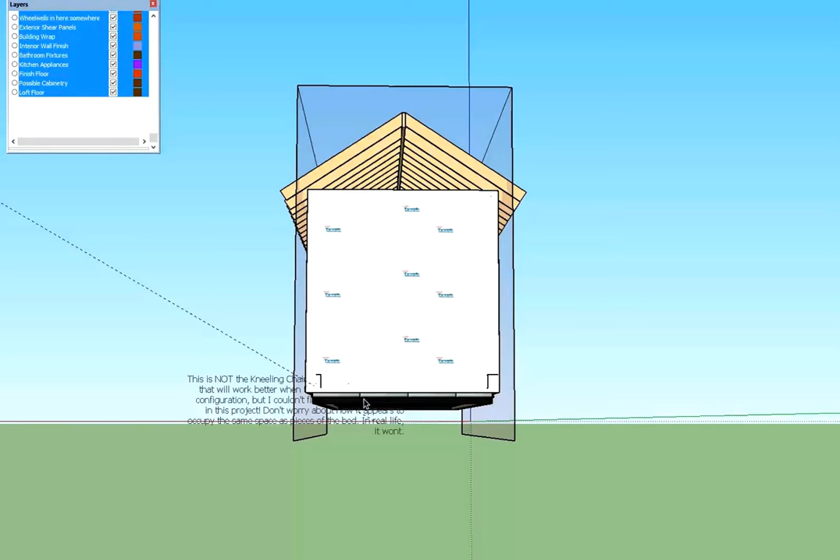Frame at a height of 24 inches above ground. You'll notice it doesn't show any wheels because that's later, and it doesn't show the tongue because I just didn't feel like drawing that in.

It didn't affect the footprint of the house. The wheels will go somewhere along in here, and that's where I started. That's also why you don't see the wheels, since the only thing they interact with is the frame.

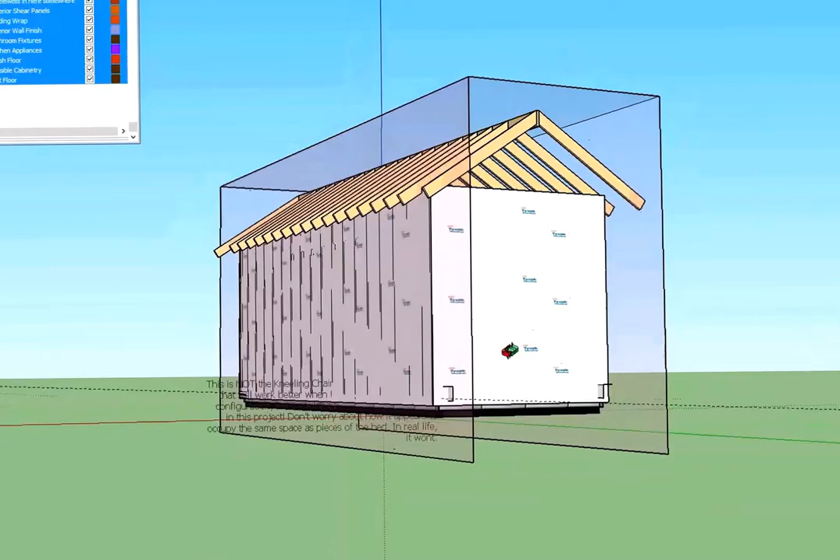It isn't a worry for me right now that I don't actually have the wheels on the trailer. However,

This kind of shaded area on three sides that extends beyond the house, you'll notice that is the bounding box for what is legal to come down the road in California, Oregon, and a few other states. The distance, most people hear 8.5 feet this way by 13.5 feet this way. That's kind of the bounding box, 8.5 here, 13.5 here.

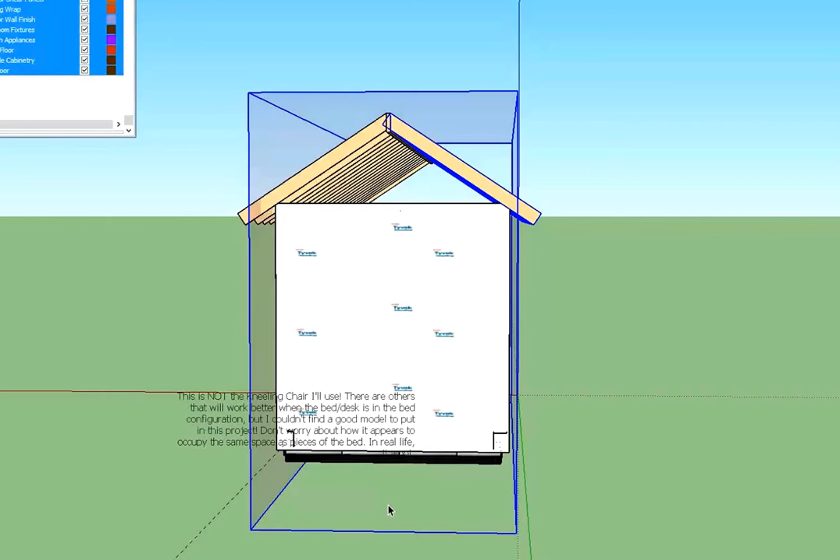Well, it turns out in California, those dimensions, 8.5 by 13.5, are kind of the lowest common denominator for all the states that drive. So it doesn't include Hawaii, but since we drive between Alaska and the lower 48... however, California and Oregon are the states where this will be, I'd guess, 99% of the time, where it will be built, etc.

And so forth. Their height limit is 14 feet, so I'm going, oh cool, I just need an extra half foot of space inside the house, so that's the bounding box.

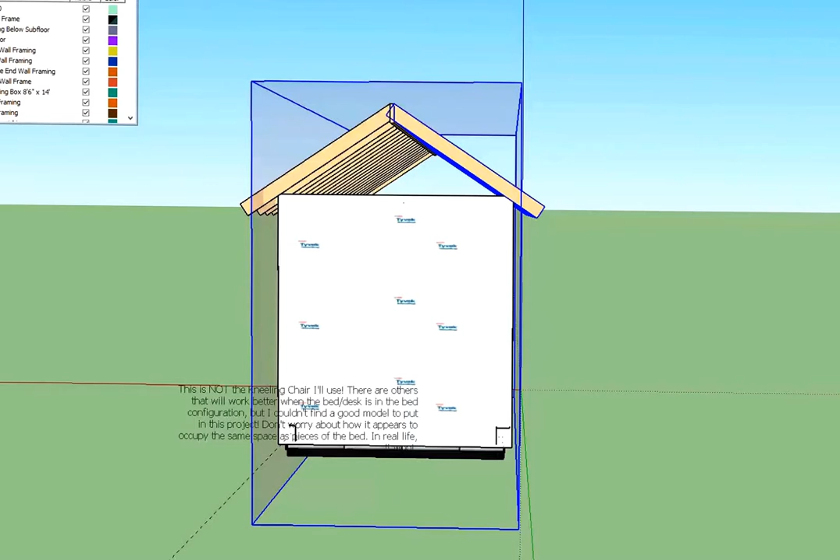Anyway, I'm going to get rid of that now. I'm just going to slowly peel these layers back until I can get some more details on the trim. So I'm going to take away that bounding box.

Now you'll see the other ends kind of sticking out. It's another kind of L-beam shape that doesn't have any volume. Those are...

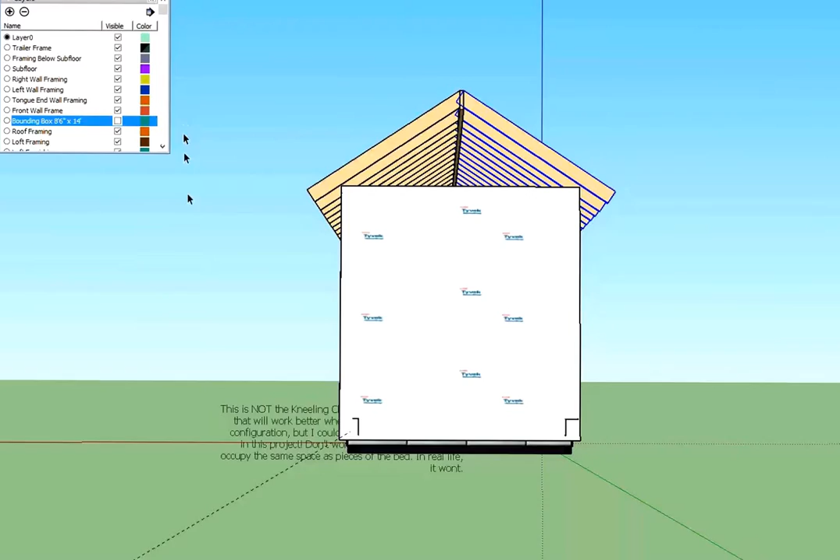If you imagine—hold on, let me just take a couple of others out. Well, let me come back to that. As you can see, I even created a texture for my Tyvek. I haven't built outward from that.

Oh, I ought to go back to the bounding box a bit and talk about the roof frame. You'll notice that right now the roof rafters are extended outside of the bounding box, and there's a simple reason for that.

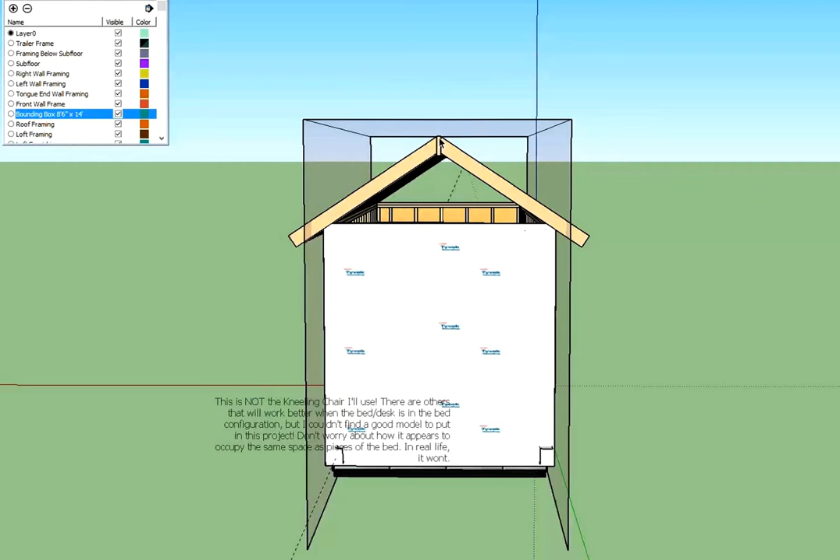I've made a few changes in the roof pitch, and it's a real pain here in SketchUp to do that. As a result, the last time I did it, essentially what you do on the roof pitch is you start out with a horizontal rafter, attach it to your ridge board, then bend it down at the proper pitch, and then start taking away from it, because when you do that, geometry starts intersecting, and that's another royal pain.

Anyway, last time I changed the pitch, it was to accommodate a roof window that is egress rated. Yes, I want to be able to get out from the loft in a fire situation if my normal route out is blocked by the fire.

It turns out that the minimum size window that would be officially rated as egress was too big for a lower pitch. I started out at 3 in 12, then I found out the roofing products I was looking at weren't okay to use on a 3 in 12, so I went to a 4 in 12 and tootled along there for a while.

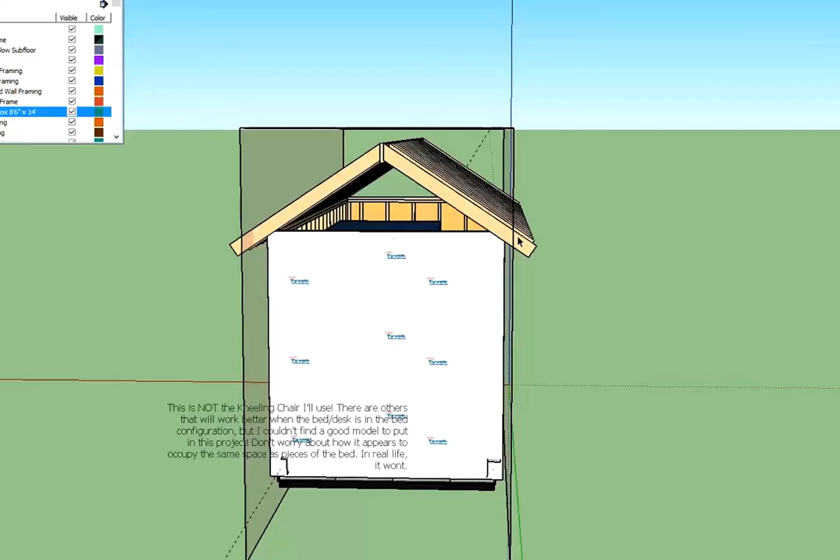Then all of a sudden I started looking into the details of the roof windows and went, oops, at a 4 in 12, the distance available for the window—which was basically draw a line, extend that line out there, parallel to this, meeting that point, parallel to this line, meeting that point, and then measuring down—

The roof window would have ended up intersecting the wall. There was no egress window I could have gone to that wouldn't have done that, and I wanted it solely contained in the ceiling. So I had to go to a 6 in 12, and I did most of the work on the 6 in 12. I just haven't trimmed out the ends of the rafters yet and done the details at the roof edge. That can be done later.

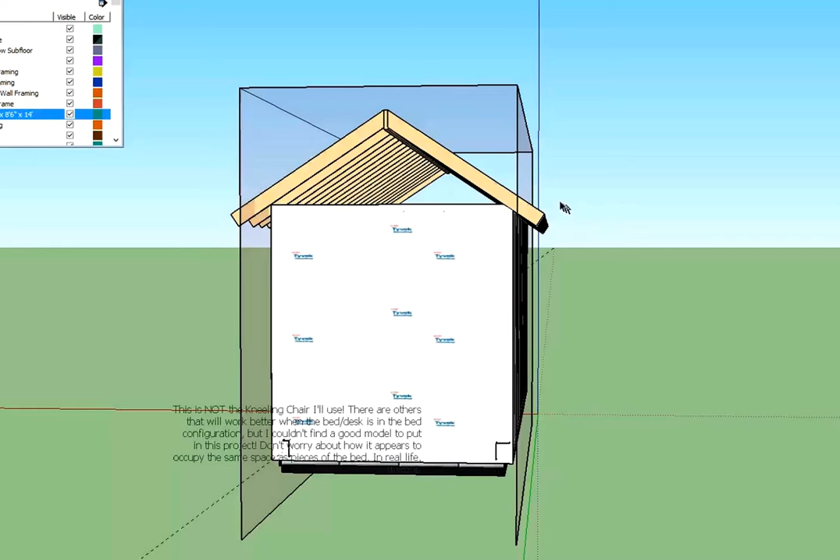Anyway, that I think is all I need to show with the bounding box. So I've got the building paper, which is here in this list to take it off.

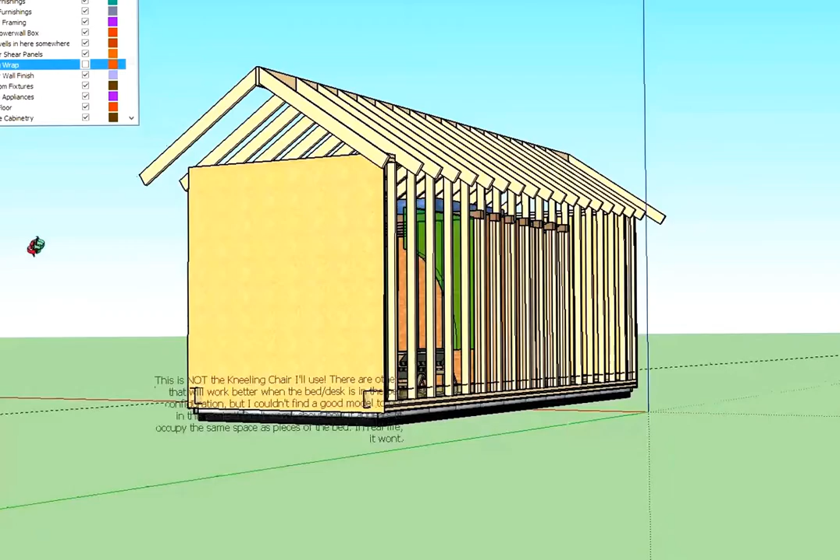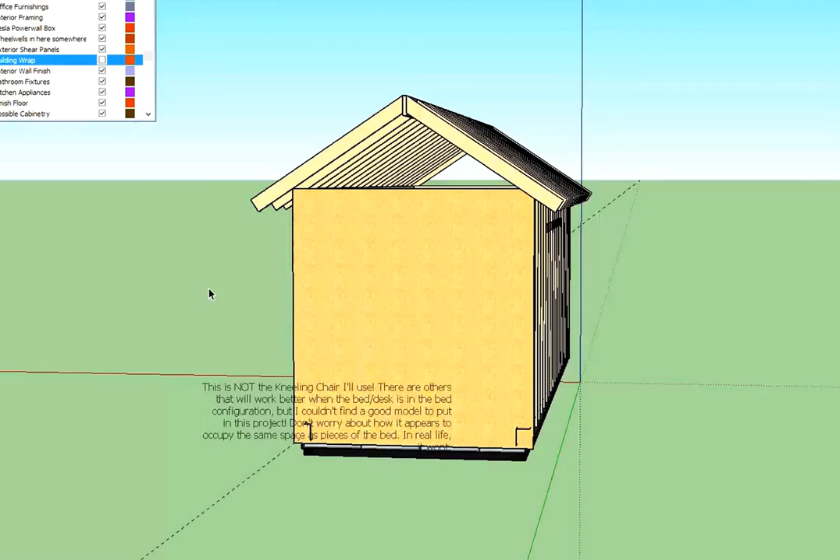Yeah, the building wrap. And then you'll notice I'm showing the next layer as we peel the onion here, which is the shear walls. You'll notice one of them seems to have disappeared - that's kind of an artifact of dealing with the building paper. For the purpose of viewing and transparency, the thickness of the building paper has no importance to the dimension of my building, but in the SketchUp model it's got to have some thickness, so I made it so thin that sometimes things go awry, and I somehow lost the shear panel on this side, which is why you don't see it. But there will be one there - that's another detail I'll clean up.

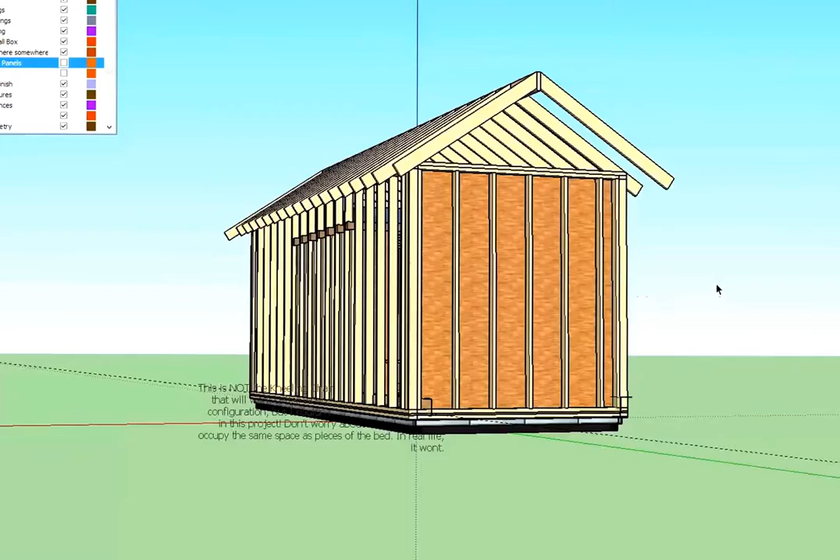Anyway, so now let's take out the shear panels, and we're getting more towards something that's actually going to give you some idea of what I'm doing. I'm going to hide that so you can take a peek inside. But one thing I ought to let you know is the orientation of my model.

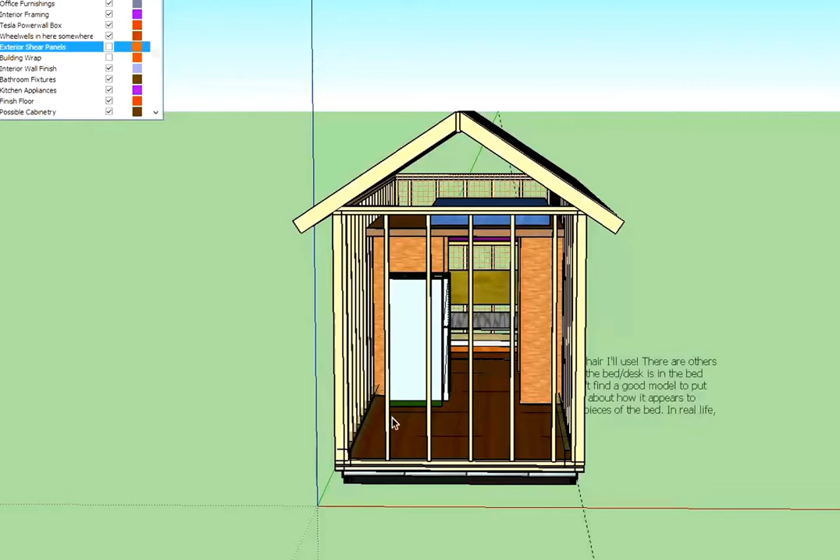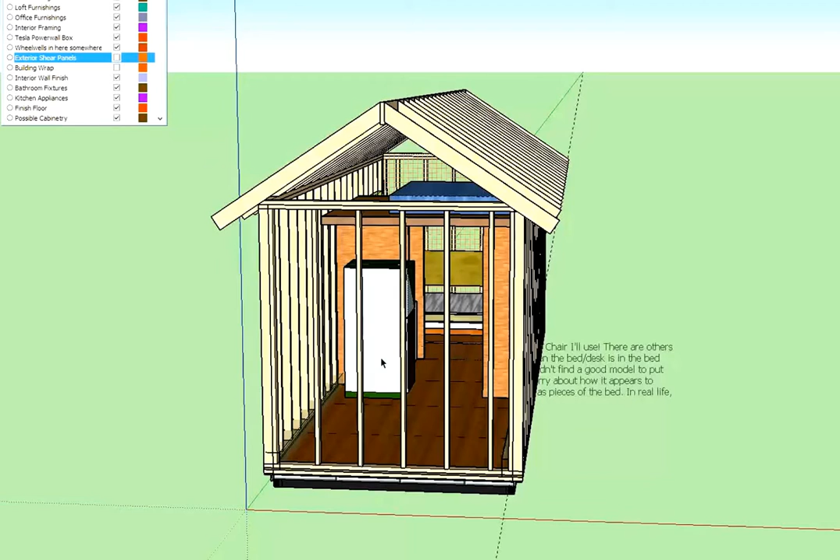This kitchen - the refrigerator may move, but essentially the front door is probably going to be on this side, and the tongue end of the trailer is the other end, though it may end up in here somewhere. Anyway, you walk in, and there's what in a regular house would be called a great room. However, it's kind of funky to call a room in a tiny house a great room, so I'm going to call this the multi-purpose room.

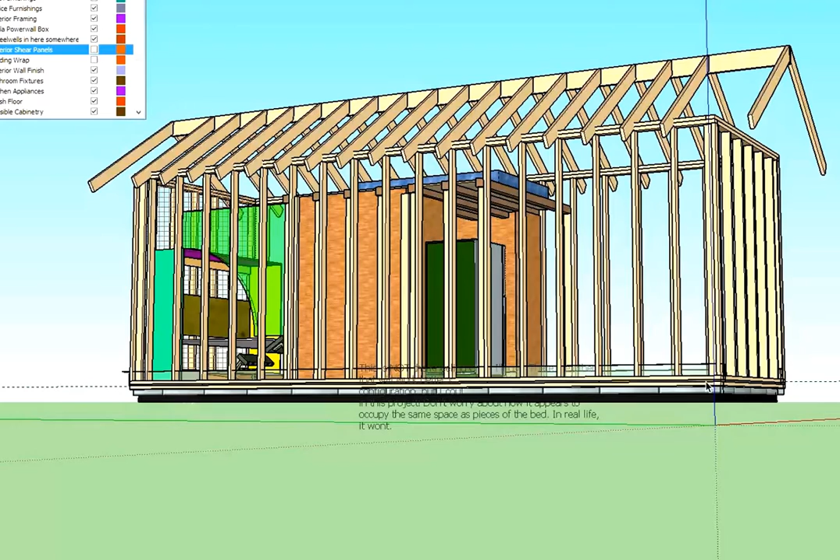Okay, let's take care of this funny shaded thing here. When I add the wheels, there's going to be a projection that comes up, the wheel wells, somewhere in this area. I'm hoping to do a weight and balance calculation and then specify my trailer with the wheels in the appropriate place so I have good front and back balance and don't exceed the tongue weight. That's why I haven't drawn the actual wheel wells yet, but I've left this as a guideline, which I'm now going to remove so that as I do details, I'll occasionally click them on and see if the wheel wells are going to interfere so badly with what I'm trying to do that I ought to find another place for it.

So let's get rid of the wheel wells in here somewhere. Okay, so now we're at the wheel wells in here somewhere. I'm going to hide the front wall and the right wall so we can get a good peek inside.

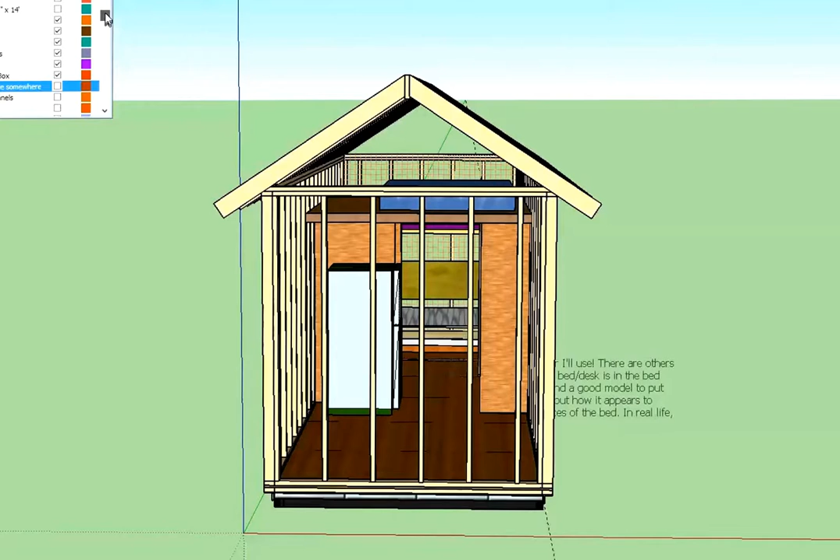Front wall frame, and for orientation purposes, since I haven't defined the door, the wall that just disappeared I'm calling the front wall. This wall's the right wall, that wall's the left wall, and that wall is the tongue end wall. I did this because I wanted to talk about the house from the orientation of how I'm going to use it as a house, not from the orientation of how I'd use it as a trailer, which would change the nomenclature. If I did it from the orientation of being trailered, that would be the front - the thing exposed moving forward - and the one I just hid would be the rear. This would still be left and right, or driver and passenger, whatever you want to say, if you're in a country that drives on the right.

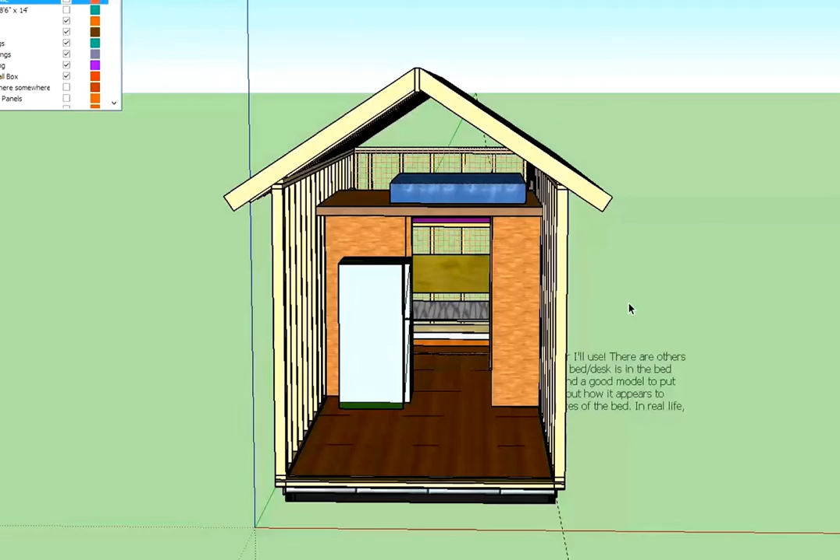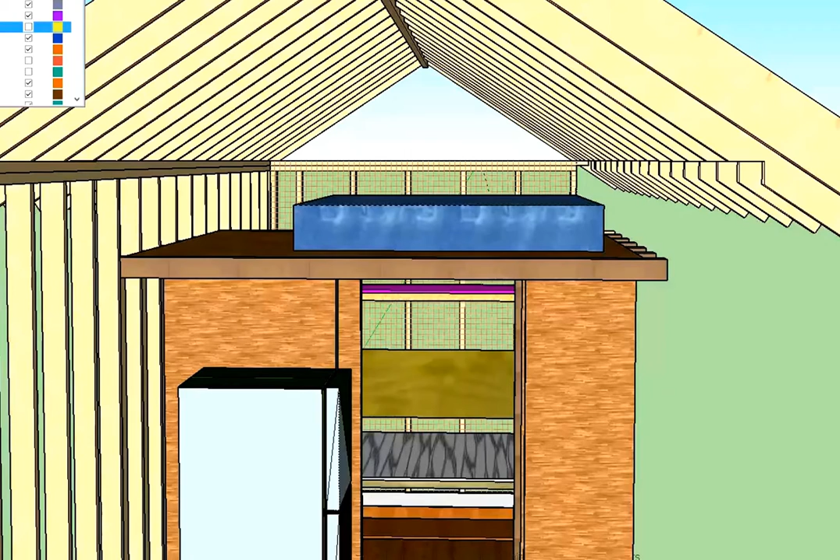Anyway, I'm also going to remove the right side wall framing so we can get a better peek inside. I want to leave the roof framing here a second so I can zoom in on the loft and show you my loft height - let me pull up the measurement tool here. Where's the measurement tool? The loft height is... I want to be on this face. On the face.

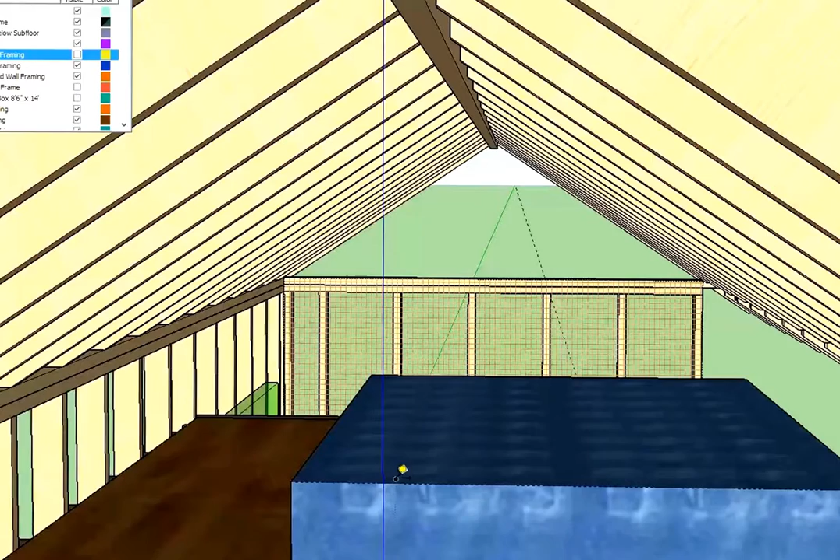Shift... I need that shift down to, come on. Yeah, it's not giving me the measurement I want. There we go, I've got

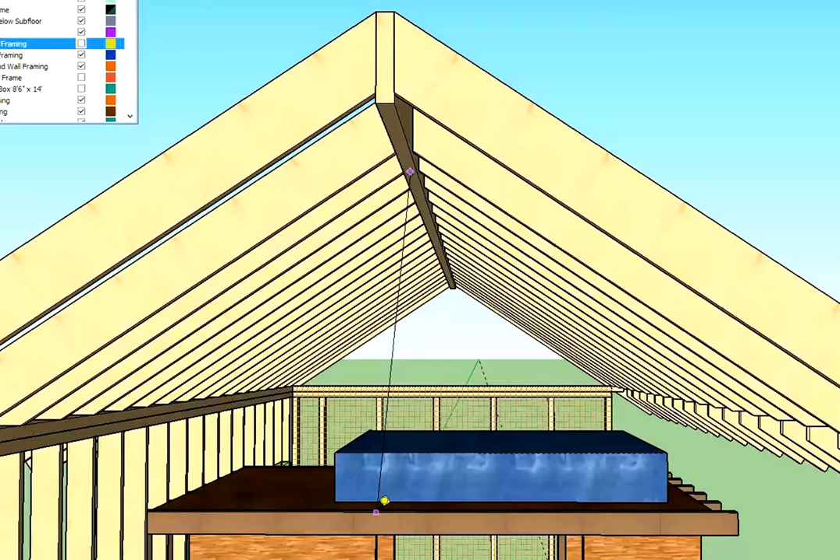7 feet and a quarter inch. That's pretty darn good, isn't it? Hey, I didn't realize I'd gotten that good. Well, I haven't done the interior finishes in, but more important,

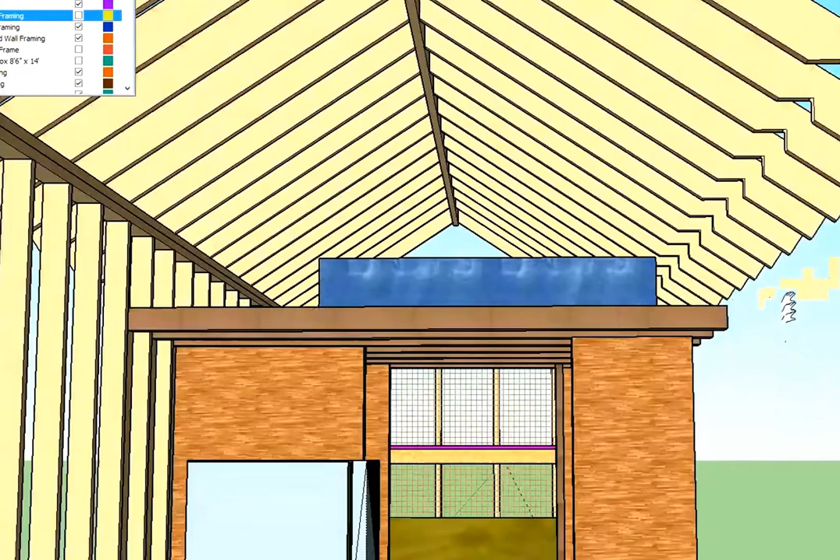I've got, even at the sides of the loft, a good 16 inches there, which means, and that's just going to be at the edge of my bed, and it's steeply pitched enough it comes up. I'm comfortable with the sleeping loft and the height I placed on it. I think I ended up giving myself a 6'6" clearance between the framing of the loft and the interior floor down here.

Anyway, so this room is the great room. This is a sleeping loft. Back here is a room that is initially going to be an office. Let me show you this in its office configuration.

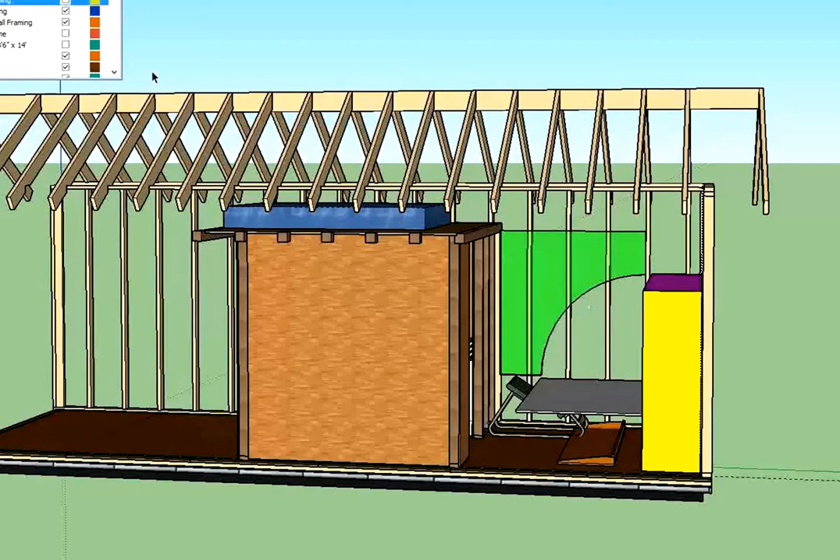Let's see, tools, window. Oh, come on, how do I show this? View, here we go, toolbars. Dynamic components, that's the one I want. I should have had this open. Okay, where'd my dynamics? Oh, there it is.

This is a Murphy bed desk. It's called a dynamic component in SketchUp, and I've done it just based on the manufacturer's dimensions, but that's closed. When I first occupy this house, this is going to be my office, and I'll sleep up in the loft. Also, because this is a Murphy bed as well as a desk, I haven't drawn in the mattress.

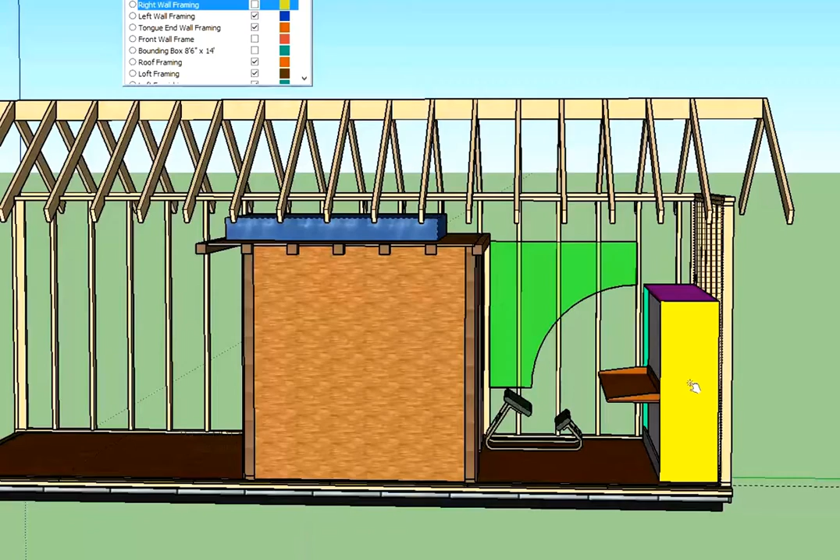This is where if I do want to put up a guest, I can put up a guest in my own home. And later on in my lifetime, when I can no longer climb, I haven't yet decided whether I'm going to do stairs or a ladder to the loft, but when I'm restricted to the first floor, then the loft becomes my guest bedroom,

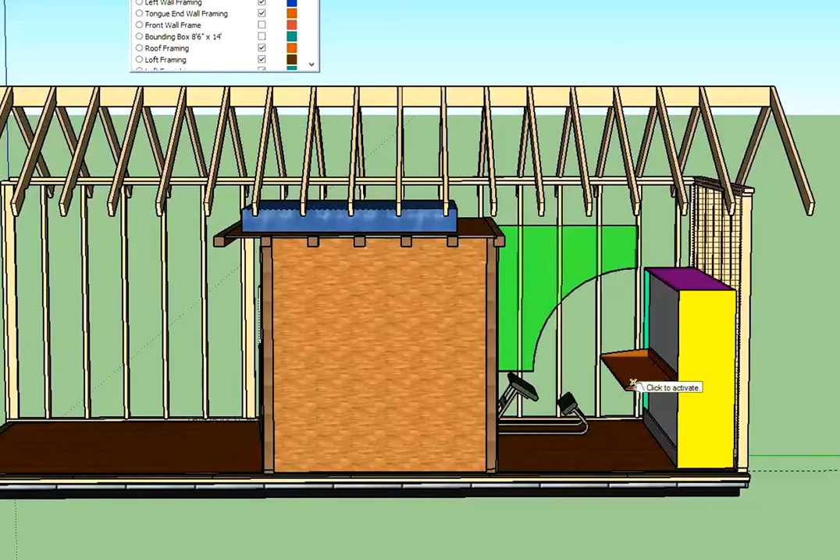and I just use the office as an office and bedroom combination. I leave so much strewn around the office these days that I really don't want to be going back and forth, which is why I plan to sleep in this loft to begin with.

This green area is something I just put in. It really represents against this wall, which is the left wall of the office, the area that I think I'm going to be able to.

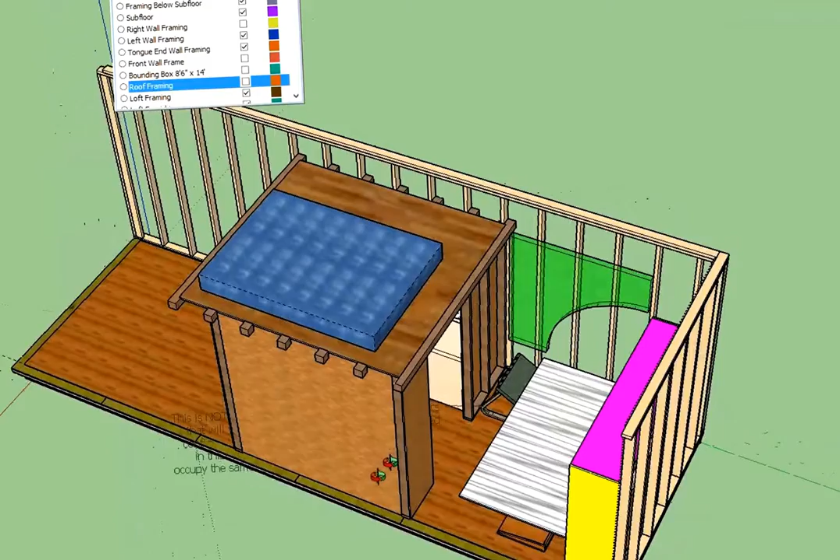Well, let me get rid of the roof rafters, the roof framing, so I can give you a little bit of an upper view. So as you can see, it doesn't have much thickness, but that's because I didn't care so much to that extent as how it would interfere with the opening and closing of the bed.

But it represents potential cabinetry areas, pull-out, other things. Another thing you'll notice is I'm showing my framing in two different colors. This color, I don't want to keep clicking. That color is plain old standard construction fir framing, studs, etc.

This darker color is redwood, and I've used it any place that I expect to have any of the structure visible once all the interior finish is on. And you'll notice that because of these beams going all the way across, all of my interior walls aren't structural, which means I can make them really flimsy.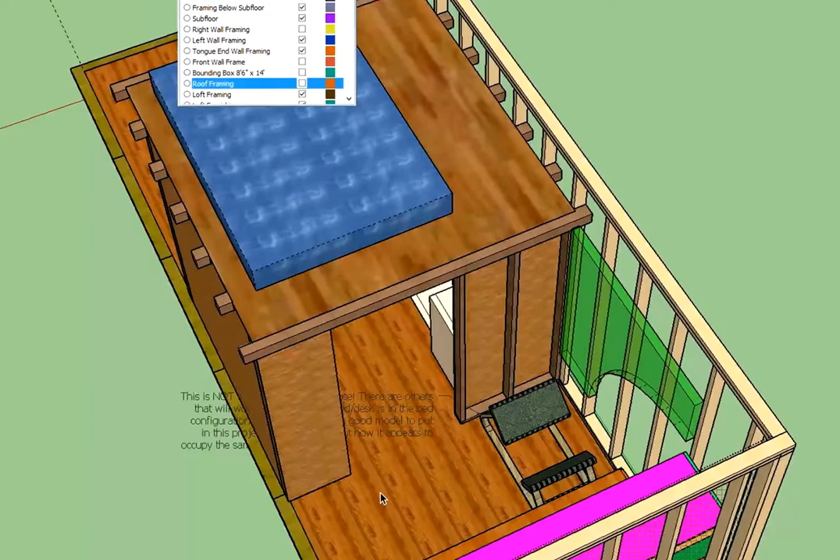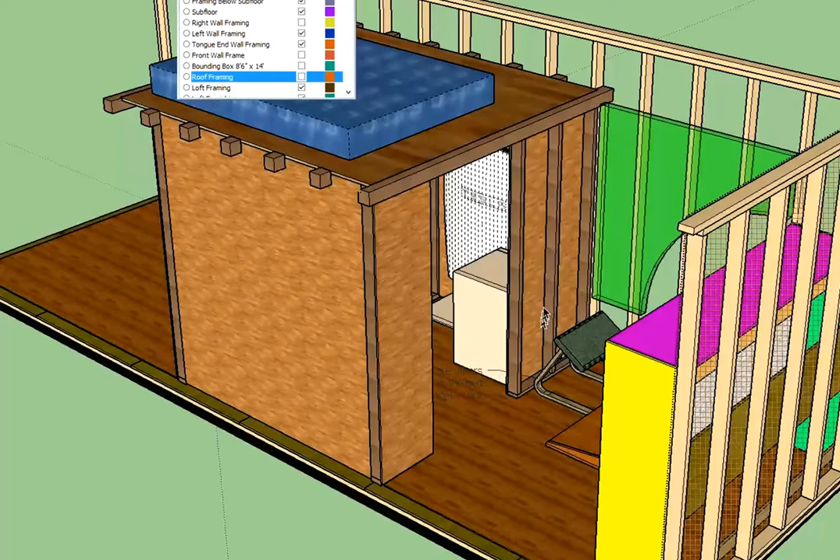It's a laminate product that just clicks together and floats. Really easy installation. Comes in about 4 foot long by, I think, 8-inch wide strips. I don't know, but the deal was so good, I bought too much of it, and I'll be left with a lot left over, and they'll end up being the shelves in all my little niches.

What other interesting things? Oh, you see that? You see that? Tesla? How best to show this?

Okay, let me take away the loft framing, furnishings, and floor so we can get a better look at the first floor all by its lonesome.

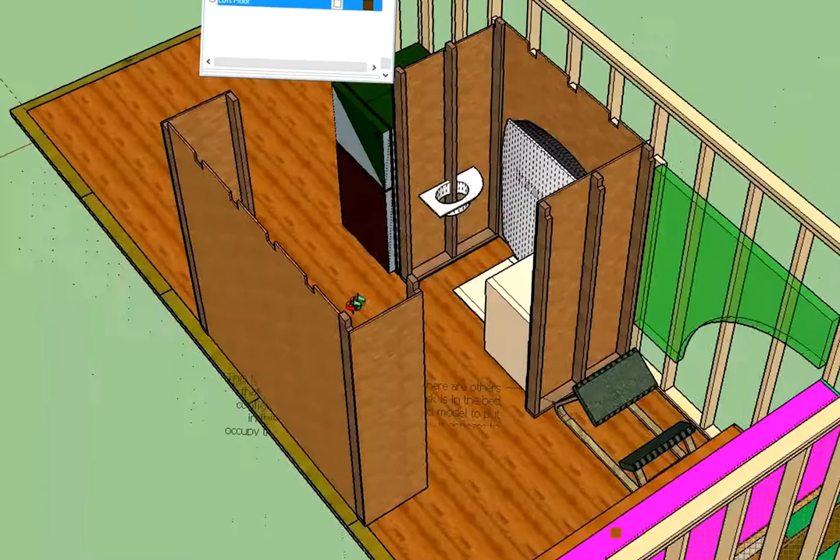At some point, if I knew that Tesla's new home batteries were safe to use inside the conditioned space of your home, then this wouldn't be a tentative plan. I would be planning on them.

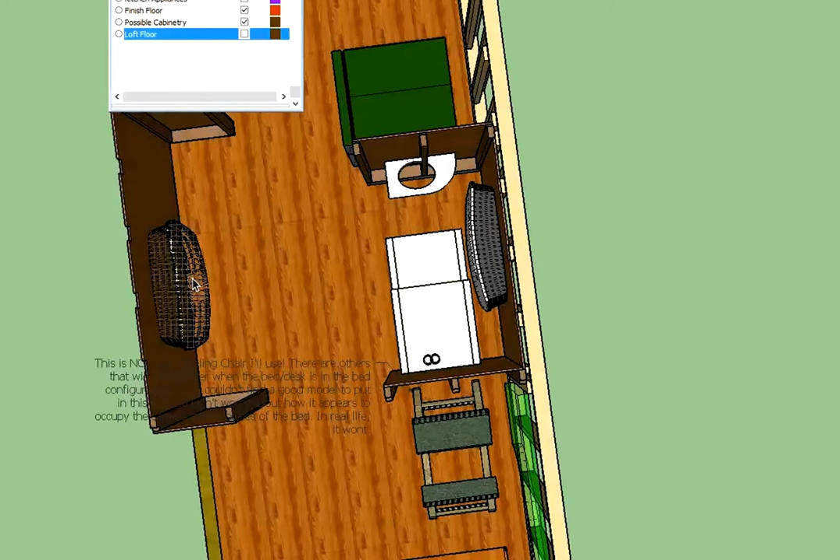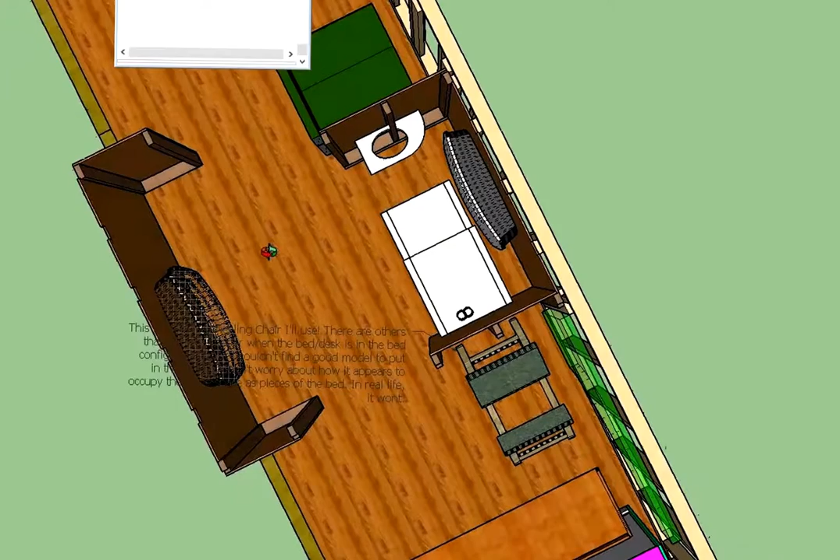You're looking at somewhere between 14 and 20 kilowatt hours of backup storage, even if I don't do anything solar. And I expect in the next 5-10 years that the ability to be interactive with the utility on those is going to be there, so that when they have high demand, they can say, hey, can we take some of your stored energy, all of this electronically, and buy it from you?

I can say yes or no or whatever. But they're heavy - 220 pounds each, 100 kilograms - which is why when I thought, gee, I really want a Tesla battery, I started first thinking outside of the house. But they're so damn deep that there's no way you're going to put them on the outside of the sidewalls, because I have to stay within the towing width limit, and that would have squeezed down my interior space by that much.

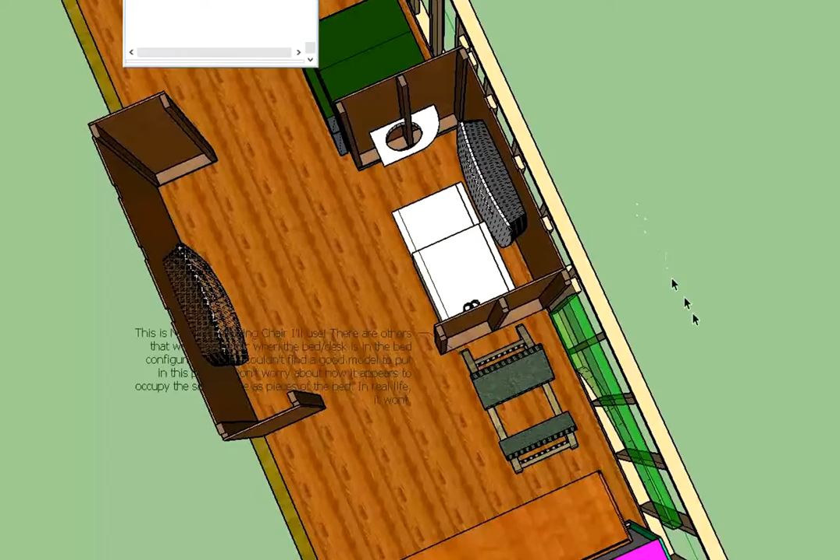I could have put them on the tongue end wall up here outside, but the fact is they aren't cheap, and I don't like the idea of a $3,000 roughly battery being exposed for anybody with the wherewithal to try and steal something that weighs as much as me to do.

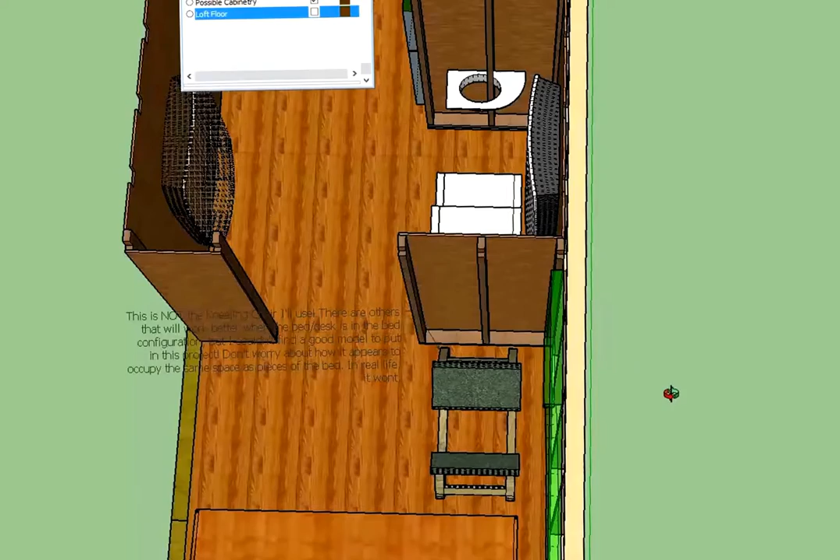So I kind of said, okay, I can do them inside, but I don't really have any unconditioned areas. Anyway, so I can't put them outside.

I can't put them outside, and inside, the only balanced place I could have put it in terms of left to right on the trailer, because they're going to be a real heavy thing in the weight calculation, would have been at either end. But doing just one of them at either end would have severely made the tongue problems and making sure that's a good weight difficult, shall we say.

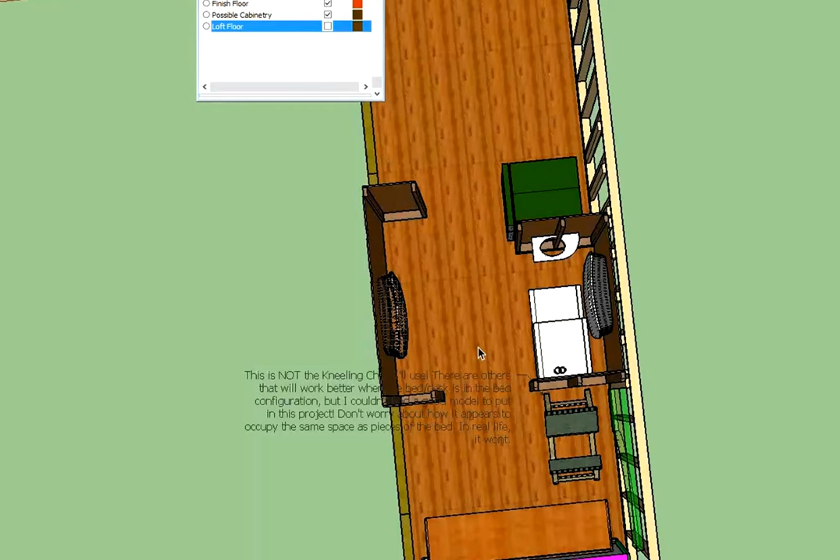So then I realized maybe try and put them somewhere near the wheels, balanced left and right, and so there's that. And while they aren't a definite in there yet, they do have to do with the planning of my bathroom, so that I can put them in the future.

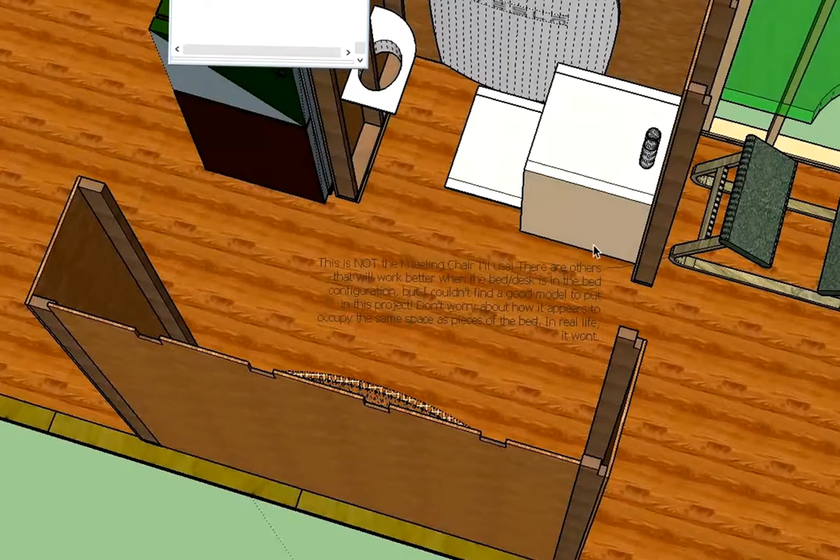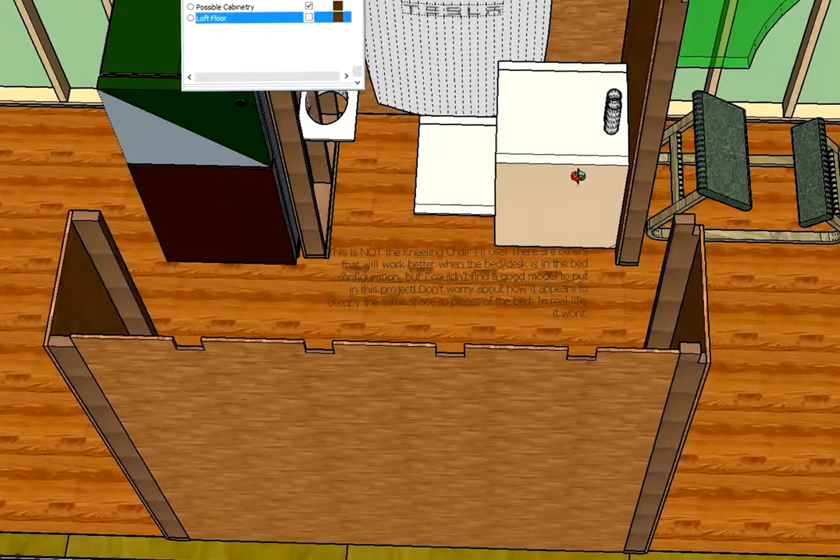Let's zoom in on the bathroom here. What you've got here is just a really sketchy outline of a Sun-Mar composting toilet. Now the toilet doesn't really have this extension, but because I've been using it to place it down just to check everything, that is what has to be kept clear in order to be able to remove the trays with the completed composted material.

So, theoretically, I could bring this wall all the way up to there if I could find another place for the sink. Oh, interesting thing in SketchUp - this is just a sink I kind of hand did. And the last thing I did before I showed you this was I moved the location of this wall by about 3 inches - it used to be 3 inches to the left. Well, the sink didn't move, so now it intersects, but that's a detail I'll clean up later.

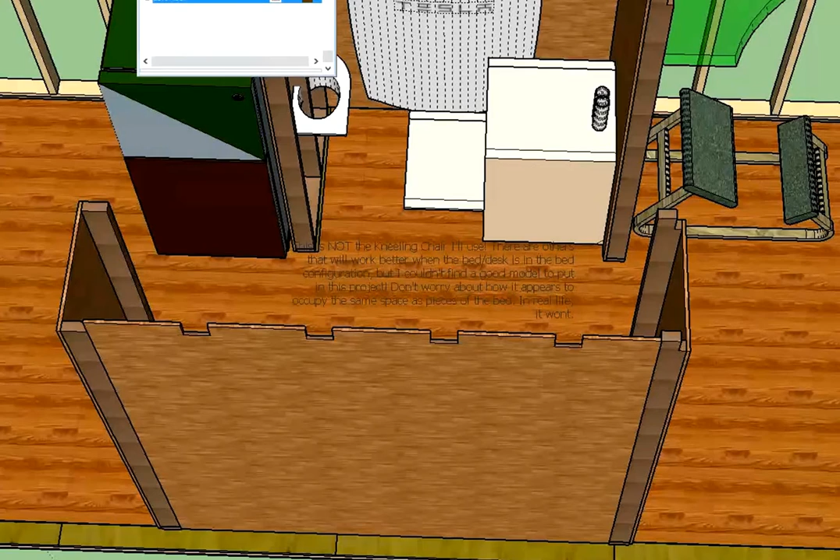So anyway: composting toilet, sink, Tesla thing, the Murphy bed desk, and how this room's going to become an office and a bedroom at the same time. Those are some of the things that are pretty firm in my design.

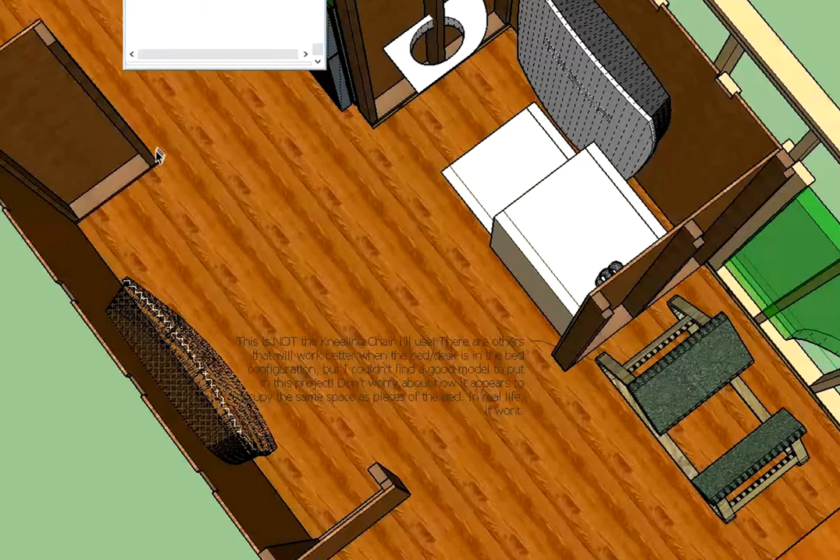This area here, I haven't filled it in yet, is going to be a frick of a lot of storage, but this hallway that ends up is still going to be like 3 feet wide. And again, this goes into my whole design philosophy in that I want this to be a building that I can use until and unless I'm confined to a wheelchair.

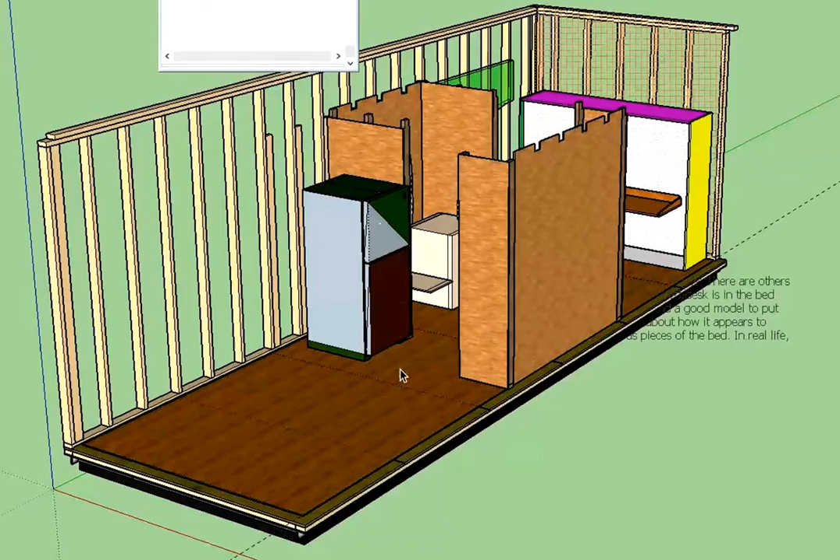So while I can still climb stairs or ladders, whichever is the access to the loft, then that's kind of one mode of my using this house. As my decrepitude sets in, once I can no longer access the loft, then I still want to make sure that I can get around on the main floor.

And the further restriction might be needing a walker for balance. So yeah, I'm going to be able to be in here with a walker, though I haven't walled in this side of the toilet area yet. I will do that just for privacy reasons, but for access, once I'm walker bound...

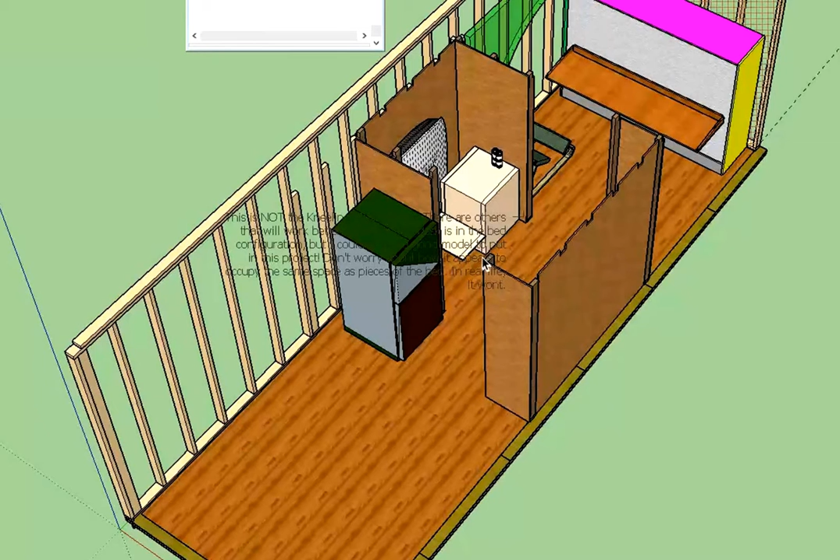I'll probably by that time not be good at construction, get somebody just to tear out that wall. I'll probably build some sort of a real lightweight privacy screen on top of the finished floor so that once it's torn out, the...